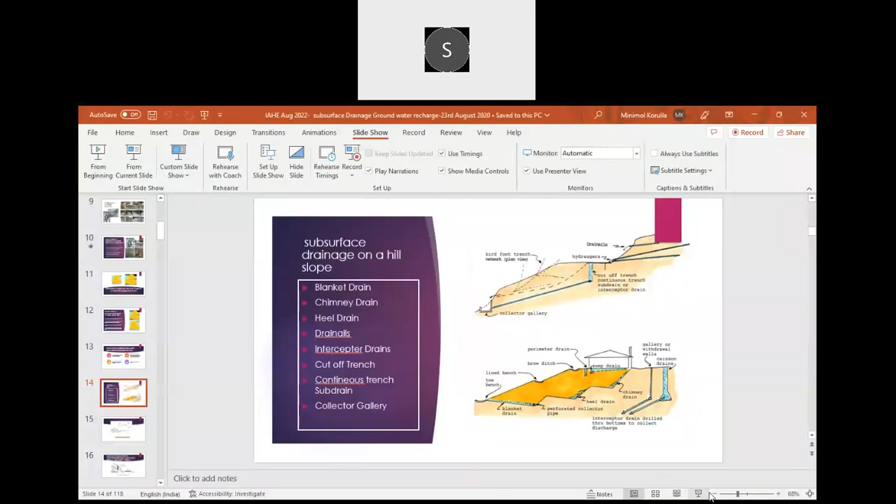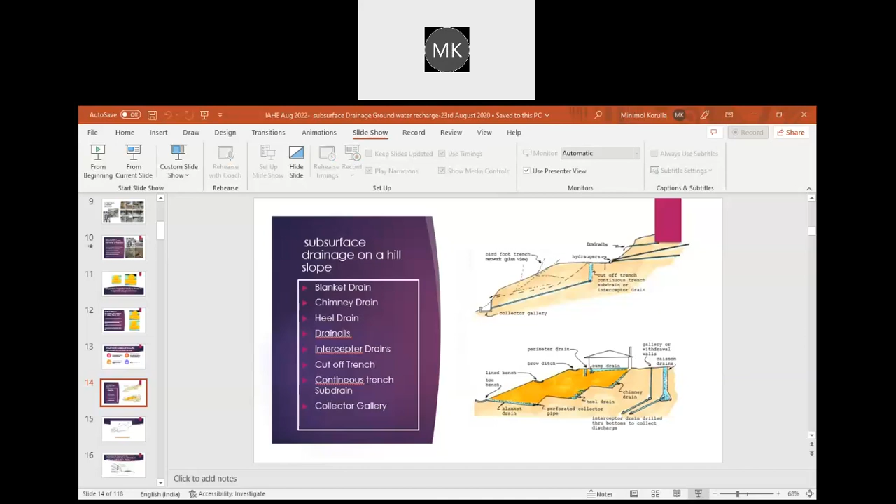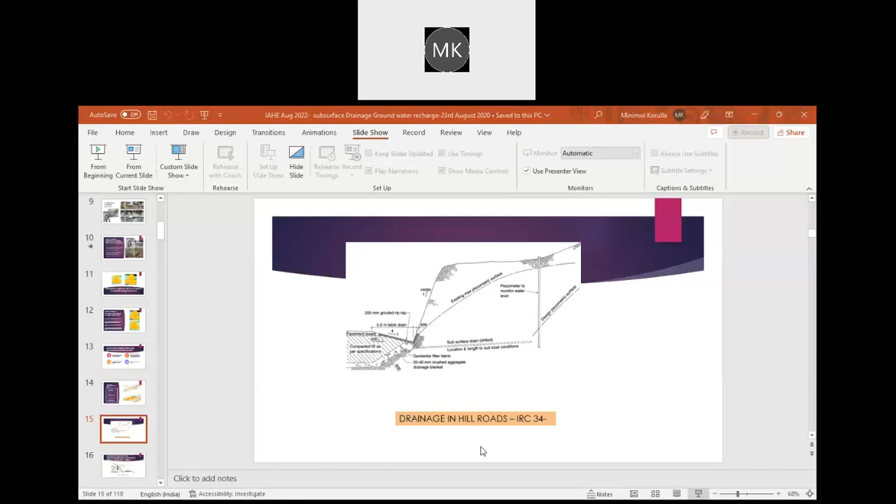Ma'am, the slides are not moving. Which slide are you seeing? It's stuck on slide number 2. Please reshare it. Now it's stuck on slide number 14 this time. Please put it on full screen. Can you see the full screen? No, madam, it's stuck. When you come to the bottom right corner, click there. Can you see the full screen now? Please make one or two clicks, then it will work. Madam, can you reshare your presentation? I think there is something stuck, I will stop sharing and reshare again. We'll find the solution.

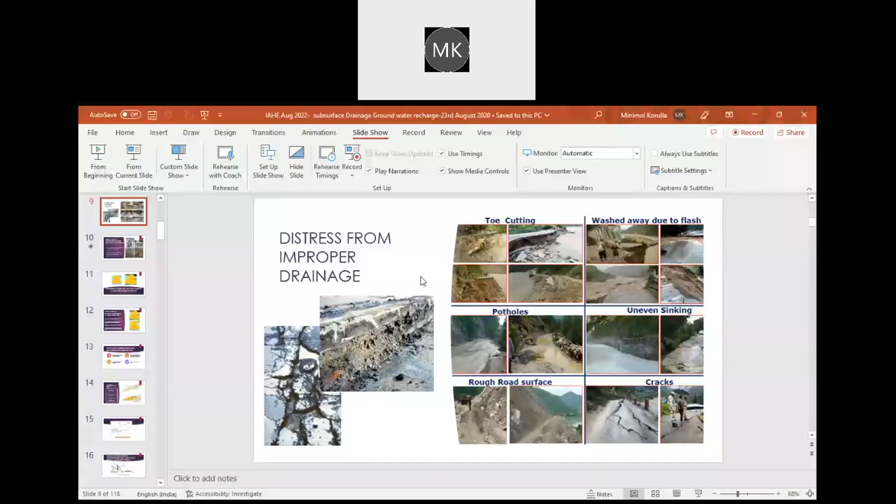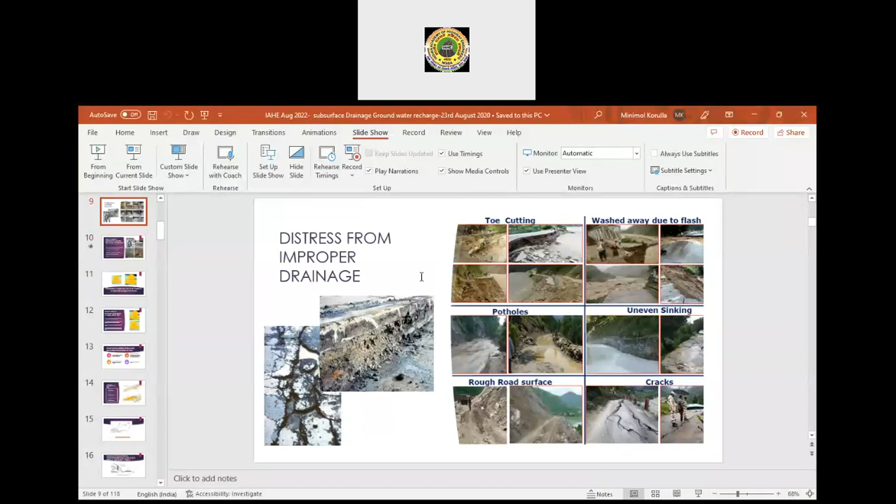Can you see it now? Is it moving? Yes, ma'am. Please put it in full screen mode. At least until you see it. I think that going full screen is creating the issue. Okay, no problem, please continue.

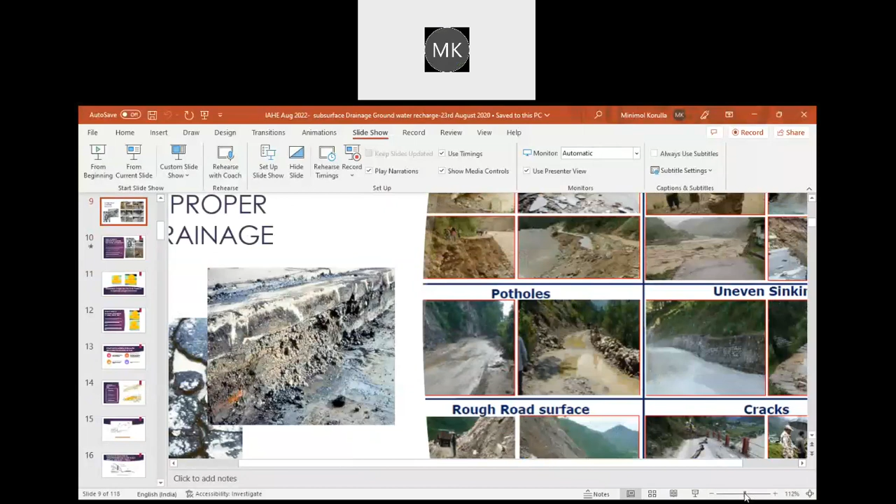I will go through the slides at least once, for whatever you have not seen. So you were seeing only up to the second slide, right?

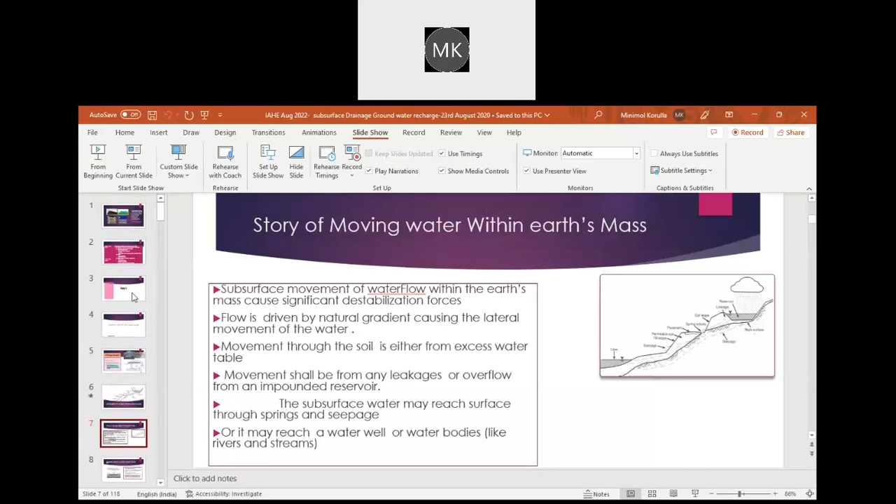Yes. Hello participants, all right.

So I talked about the different types of moisture sources from IRC SP 48. Can you see the slide?

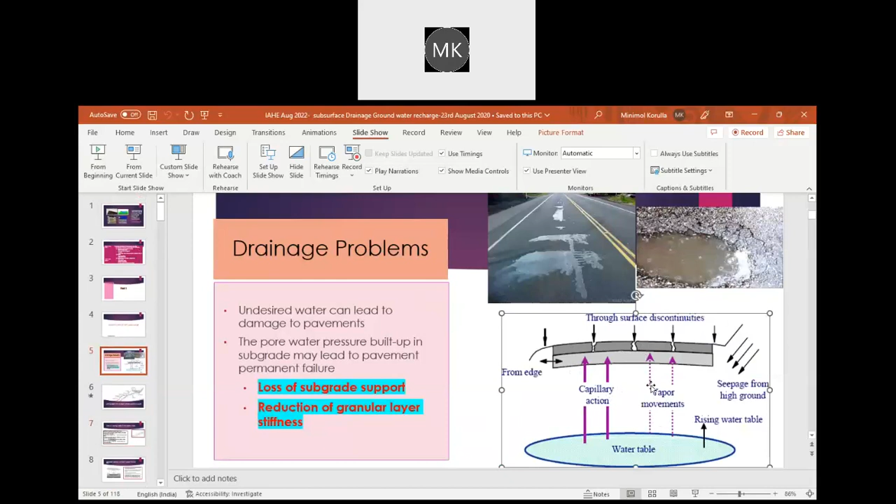Yes, ma'am. This is the movement of water within the Earth's mass. Okay, how it is going. Okay, we have seen.

Were you able to see? I know you are not able to see the complete screen, but at least are you seeing something? Yes or no? Yes, ma'am. Okay.

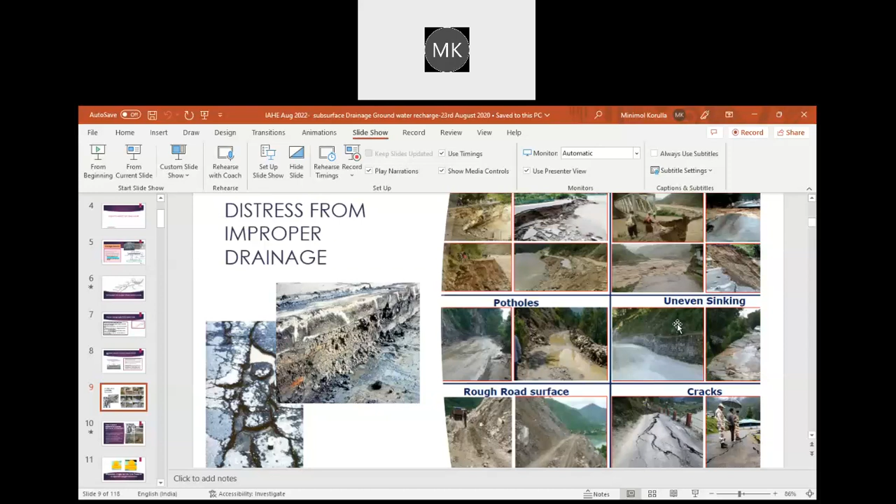Now, when it comes to the cracks, the different types of water movement can cause different types of cracks. So from observing the cracks, we determine whether subsurface water is creating the problem, and how we have to rectify it.

There are different ways of taking out the water, but it requires careful mapping when somewhere a deterioration has already begun.

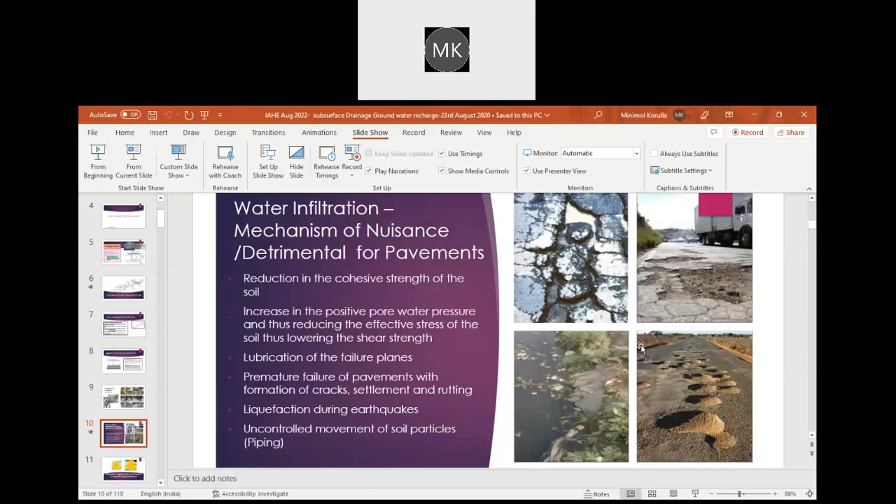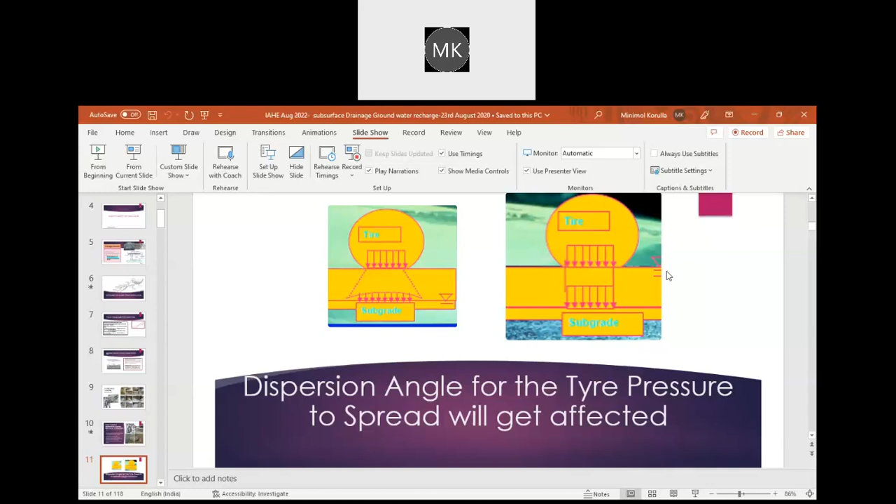Yes, okay madam. Then we talked about piping. Piping is another serious issue. When subsurface water flow is there, there can be piping, and this can cause pavement deterioration, and even the entire road can get damaged because of the piping problem. Not only roads, but piping can cause railways to fail, airports to fail.

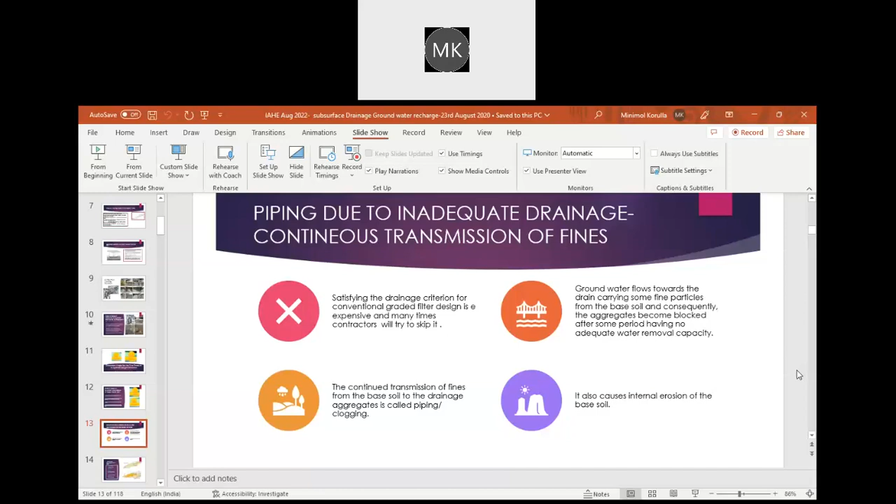The reason is the geological behavior in hill slopes, which will be having different types of aquifers, different types of seepage paths, and different types of infiltration properties for the strata. So accordingly, one has to decide how the drainage needs to be provided.

For this, we will not be able to just see the photographs sitting in an office room and decide how we have to give the drainage in a hill road. Definitely one has to visit the site. Apart from that, a lot of data collection has to be there.

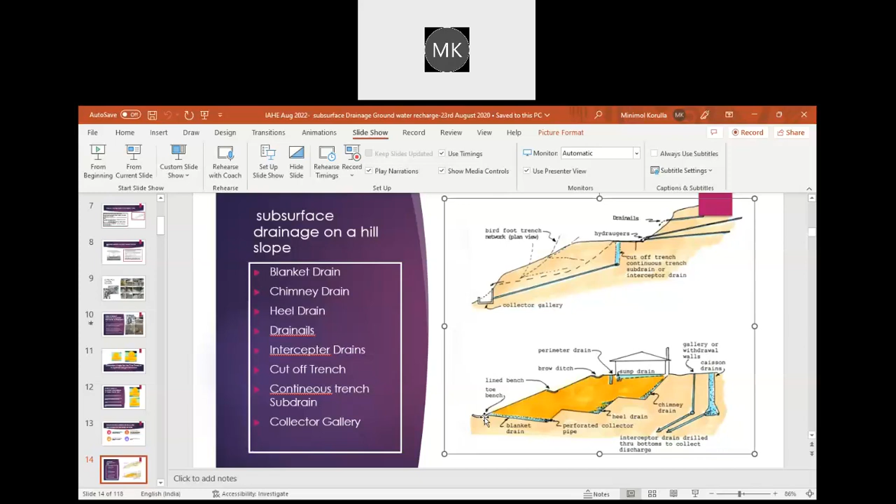Now, the sketch shown was from IRC SP 48, which is exclusively written for hill roads. Now I am coming to IRC 34, which deals more with situations where roads are in flooded or waterlogged conditions. IRC 34 also gives a sketch for hill roads.

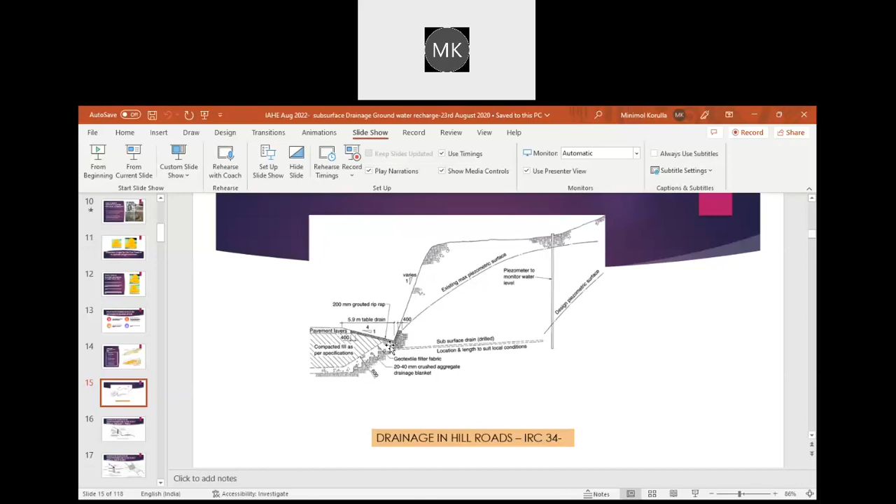In places where we won't get enough space for surface and subsurface drains, alternate materials like drainage geocomposites become relevant. If we incorporate geocomposites where space is difficult to get, we can solve this problem. With aggregate drains, we already know the demerits 100%, since we've been familiar with such materials for years. But with new technology materials like geocomposite drains, which are polymeric products, many merits and demerits are still not clear to road engineers. We'll come to that.

So in those types of cases, we may have to create drainage galleries, which we have seen in the IRC SP 48 illustration. IRC 34 is also repeating that we may have to provide, in hill roads, for hillside slopes as well as valley side slopes, apart from horizontal or inclined pipes and roadside longitudinal drains, this type of intercepting drain like drainage galleries.

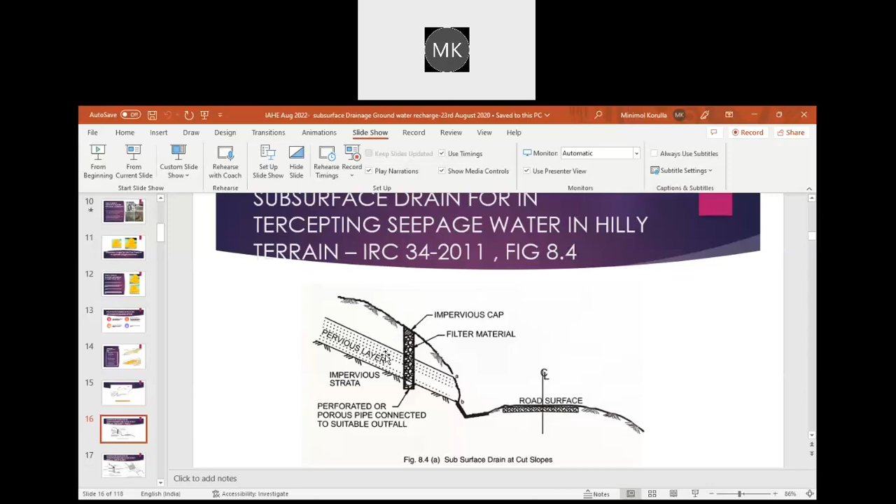So to optimize, we can separate the surface water drains and subsurface water drains. Surface water drains can go with a simple tube system, open drains, which will collect the surface water. For subsurface water, as we are plugging it at the top, the drain will be purely for subsurface purpose, and then we can optimize the size of the subsurface drain.

So there are some more figures talking about the concept in a hill road, again from IRC 34. The left side sketch shows that instead of one single pervious layer, we can go for two pervious layers. And on the front face, if we are providing a retaining wall, the retaining wall preferably should be a self-draining retaining wall. If the height is not much, only 1 or 2 meters, we can go for dry rubble packing.

The masons should pack it properly, dry rubble packing without any mortar or cement, given as the retaining wall. It can go up to 2 meters or 2.5 meters. Then with some pervious layers acting as horizontal drainage, and with this type of pervious retaining fascia, the water will come out.

If the height is more, say more than 2 meters, then we can go for a gabion fascia. Gabions are rectangular cages which can be filled with stones, and each gabion box can be connected to the adjacent gabion box through lacing. Once connected, it acts as a monolithic structure, which is again a free-draining structure. So with gabions instead of a dry rubble wall, we can go to higher heights of retaining wall construction. The gabion, while acting as a toe retaining wall, can also act as free-draining support.

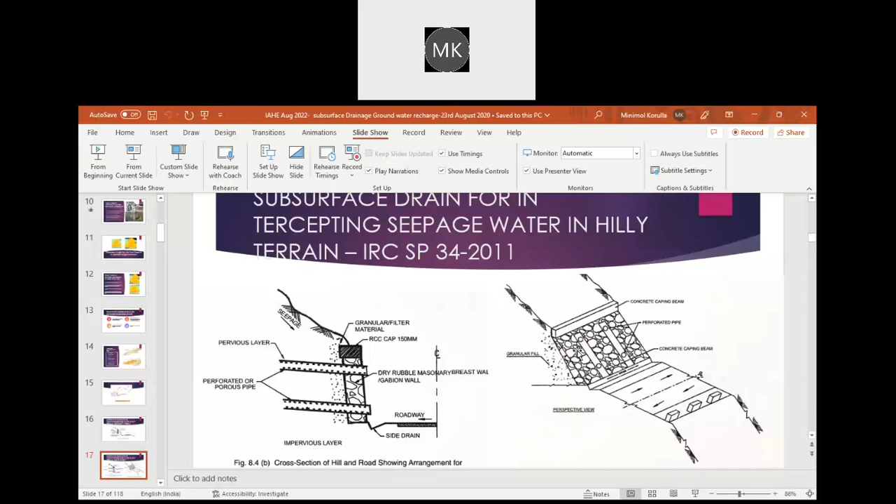Now, simple aggregate drains. Suppose a highway is going parallel to a complete agricultural land or a recreation area where lawn or vegetation is there. In those areas also, the surface water as well as subsurface water, if not regulated properly, can create problems for the nearby road.

So surface water drains can be created in those cases by simply making horizontal as well as vertical drains filled with aggregate—that creates a good drainage system, and that was the original practice. But nowadays aggregate is becoming such a costly material, so definitely for surface and subsurface drainage we have to find out other options.

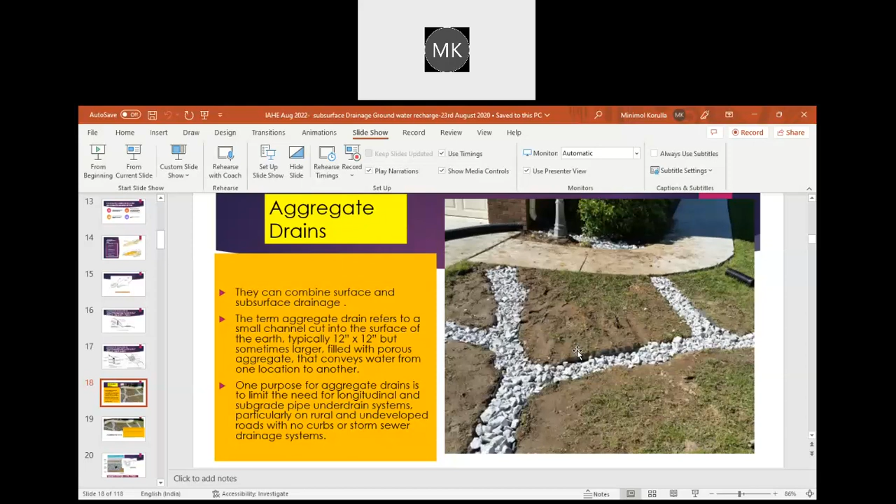Okay, well, yeah. So now it is 11:05. Your break is at 11:15, right? Okay madam, right, okay.

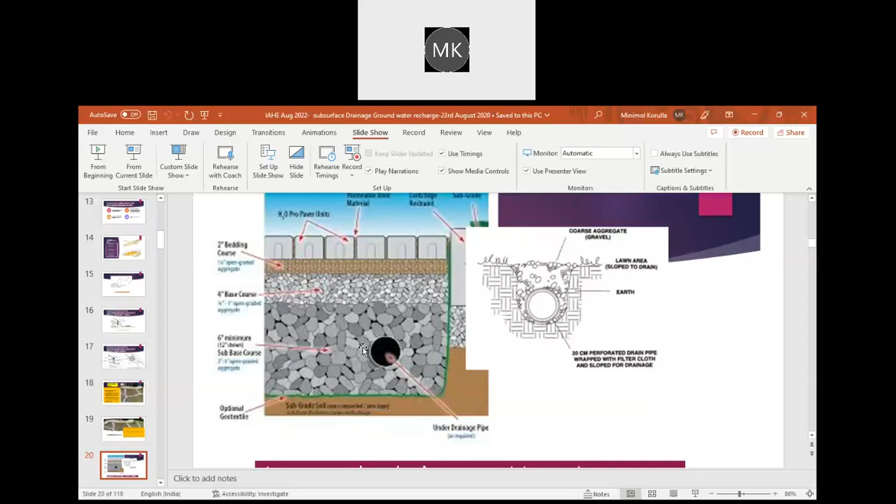So what is the indication here? We are showing the different aggregate sizes when going for base course as well as sub base course. So how these aggregate sizes will be influencing the drainage efficiency—where can we get guidance on that? I have gone to the next slide.

So why am I telling this? See, there are other types of drainage measures, like by means of pressure—vacuum consolidation. So suddenly we can reduce the water level in a flooded area. But the issue will be when we are going for vacuum consolidation or vacuum drainage, maybe a sudden movement can happen.

Suppose a highway is going and we are using vacuum methods where we are suddenly drying the water level by applying pressure—then the relative subsidence which can happen can cause cracks in the pavement surface and cracks in adjacent buildings. So simple aggregate drains or simple subsurface trenches are still the popular method, as they work gradually, but may not cause sudden surprises.

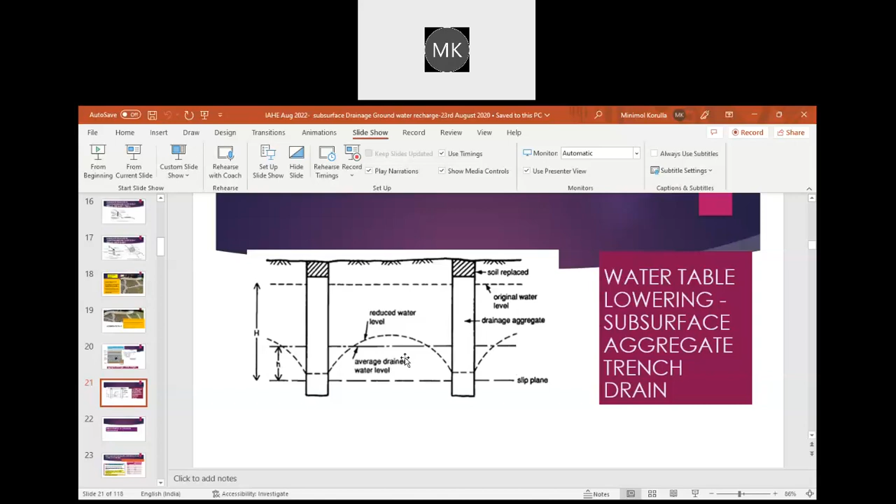Now, we basically want to talk about this after the break, but before the break we have 5 minutes. So I will give you an introduction to geosynthetics in drainage application, as that is also part of today's syllabus. Before talking about this particular slide, I am moving ahead a little.

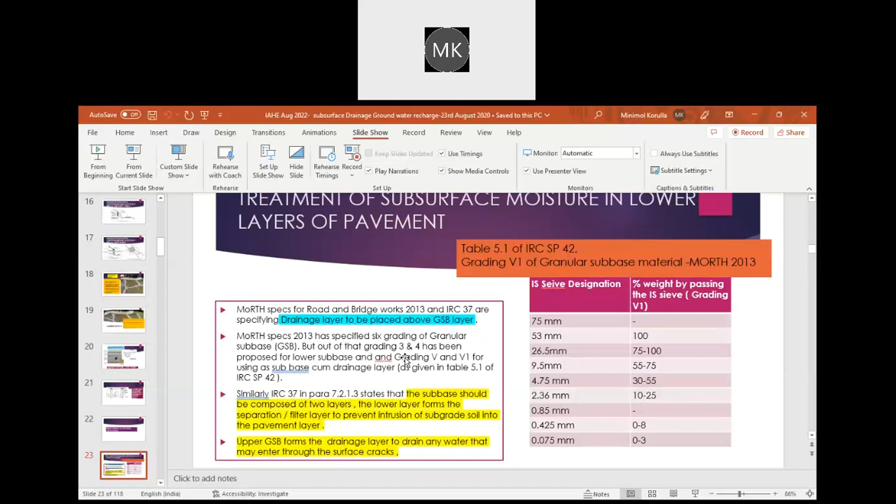Geotextile, I think all of you know about. When we are using a polymeric fabric in presence of soil, that is called a geotextile. Geotextile can act as a good separator as well as a filter, definitely if we are properly selecting it. So if we are sandwiching a geonet in between two geotextiles, it will become a geocomposite, which can be used for drainage purpose.

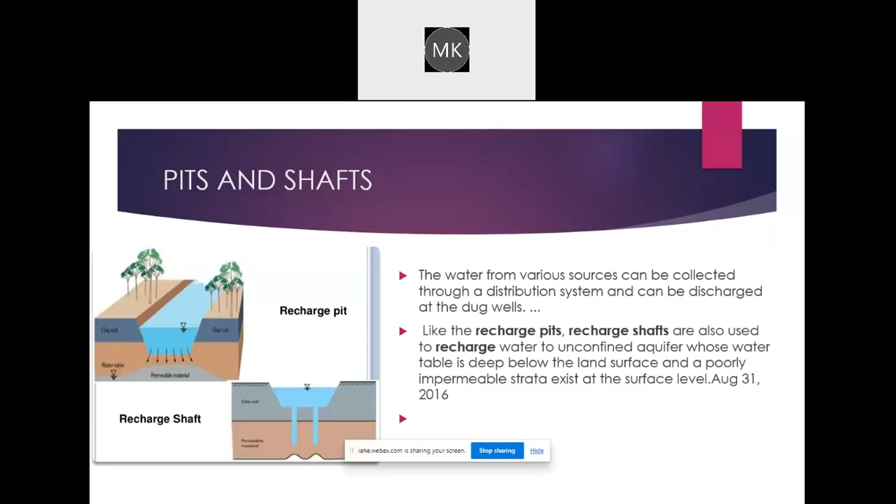Before going to groundwater recharge, any questions about the subsurface drainage or drainage geocomposite? Or shall we continue? Ma'am, please continue. Okay.

Okay, so groundwater recharge. Why does groundwater recharge need to be studied by highway engineers? My answer is: when we talk about drainage water, the water drainage may bring a lot of water, and instead of wasting it as a resource, it can be used for groundwater recharge if channelized properly. As a holistic designer, planner, or constructor, one needs to think about sustainability not only for the highway but also for the adjacent neighborhood where this resource can be used.

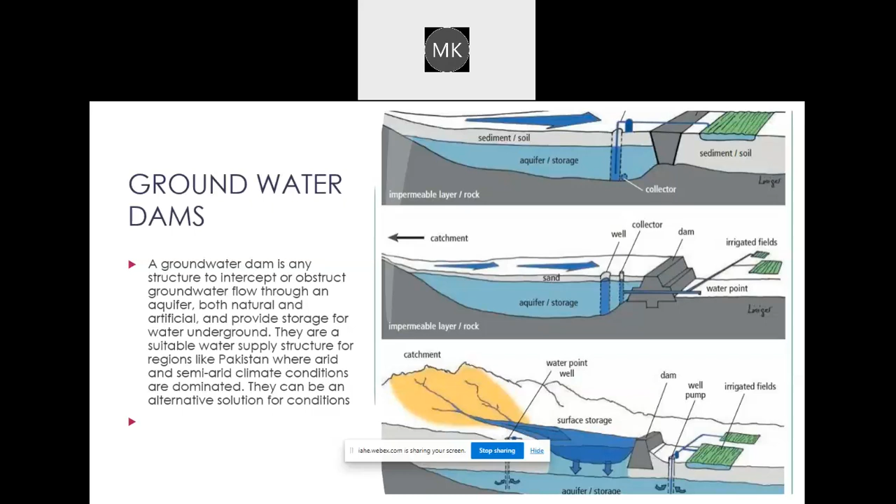Especially in industrial areas, when constructing a road and industrial waste itself is being used as embankment fill or other infrastructure building material, the water leached out from that - whether it has any properties detrimental to human life, animal life, or plant life - that needs to be known.

And artificial recharge, done in an engineered way, can give numerous advantages if we know the right way of artificial recharging.

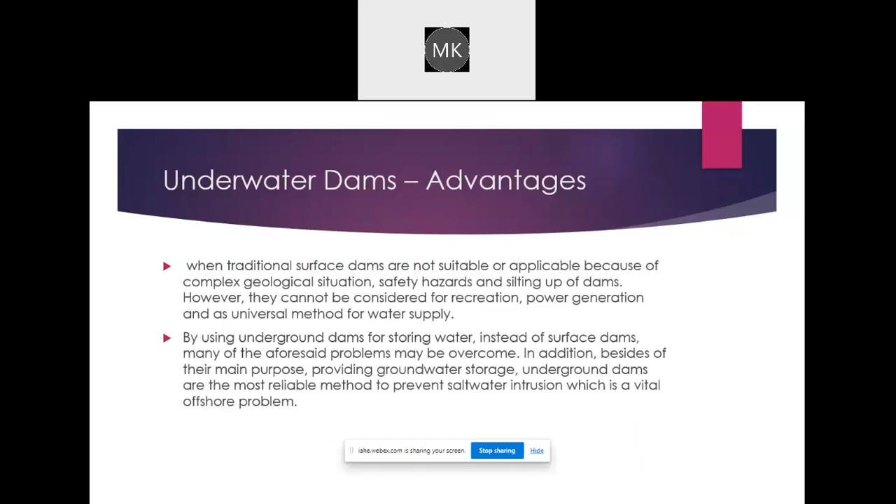So one way is check dams. The check dams are something the water resources department normally uses for collecting water in a stream or river, where they want to store water, divert the water, or dissipate energy - they used to use weirs or check dams.

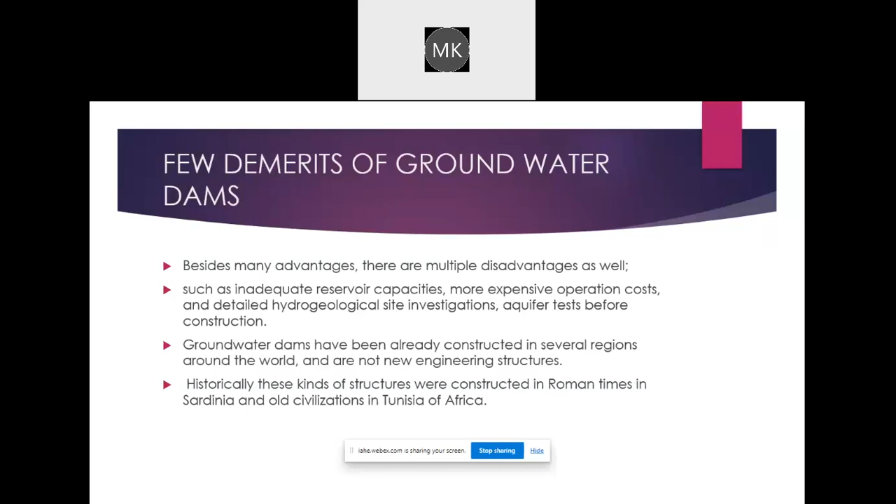But in our case, suppose a hill road is going between a hill slope and a valley slope, and on the hillside a lot of debris flows are happening - a lot of debris flows are happening, and these debris flows are not visible to the road user.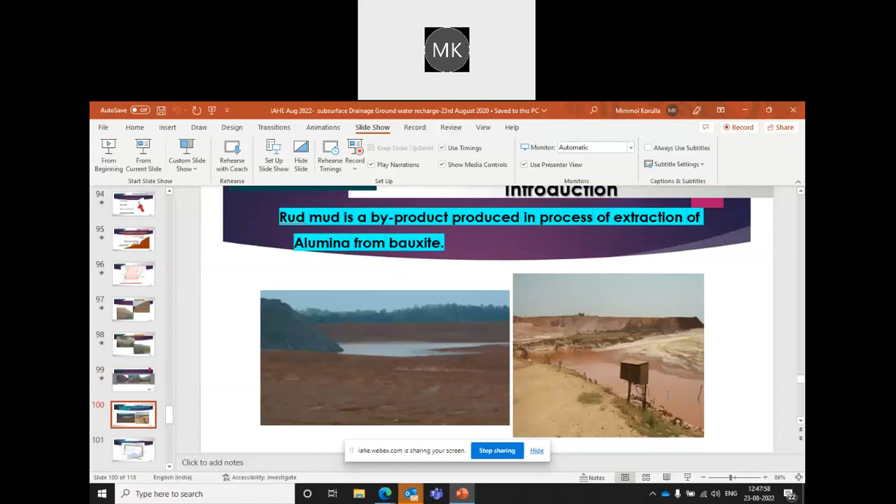So instead of waiting for extra funds to do everything perfectly, whatever we have, since you represent the client organization, you can decide that at least this much will be kept for drainage and erosion control, because these will make a sustainable earth for our future generation. If we don't take care, nobody will.

I will be happy if it can go up to 7 to 10%, but at least 2 to 3% minimum, especially on a hill slope, for simple drainage and erosion control, can avoid a lot of future problems. In many places we cut slopes vertically without drainage, so the slope itself becomes unstable because we are cutting vertically or too steeply. It can stand only if we give very good drainage and erosion control.

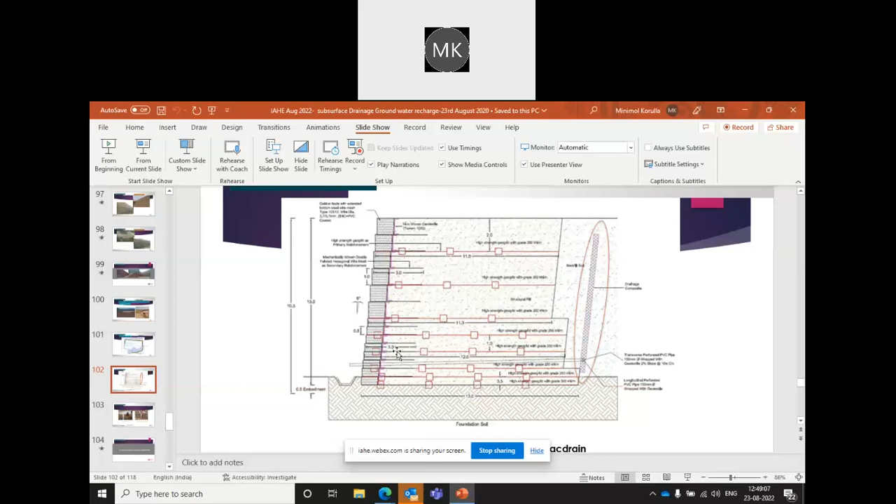Make drainage a practice, even without going for elaborate methods like drainage galleries or check dams. At least we can give some benches, some vegetation, and simple trenches or simple pipes.

Now let me talk about the cost factor. Nowadays aggregate is becoming very costly. Earlier, 20 years before, when I talked about drainage geocomposite at CRRI or the ministry, everyone would listen, but at the end they'd say these are good for research purpose because they are very costly, coming from abroad with 40% import duty. The cost of a drainage geocomposite was around 600 to 700 rupees per square meter, whereas an aggregate drain of the same length would cost only 350 to 400. So geocomposite was double, and they didn't want this type of fancy material.

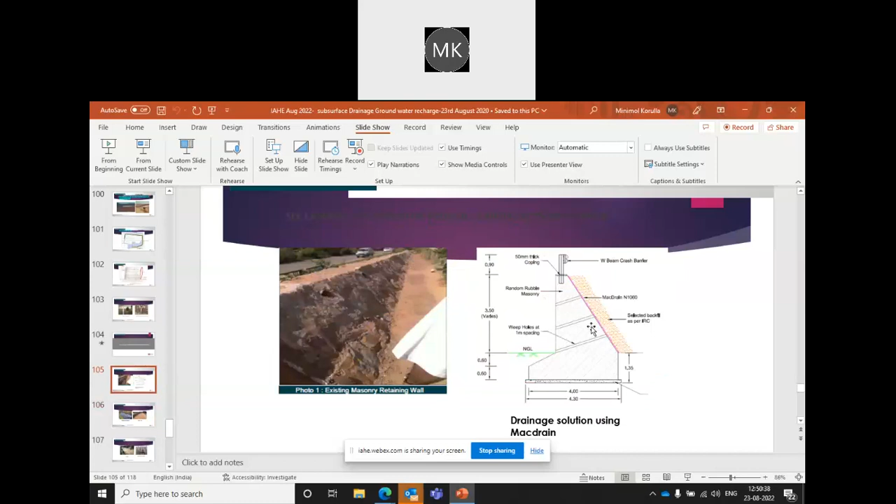And it was right also, at that time. Even though the geocomposite had good quality control from the factory and was very easy and fast to install, it was a fact that the aggregate material was available cheaper in our country.

Now the situation has reversed. The aggregate cost in many parts of the country has shot up, ranging from 800 rupees per cubic meter to 3000 per cubic meter, and in some places much more. Whereas the drainage geocomposite cost has reduced, now available at 150 to 250 rupees per square meter. So compared to an aggregate drain, at one-third of the cost, someone can go for drainage geocomposite, and it became a very hot material.

And nowadays Indian manufacturers are producing it, so there is healthy competition. It is not brought from any other country, so there's no import duty, of course taxes and other applicable charges are there. So the alternative technologies available at present need to be used.

That is again my recommendation, but we will not be having a perfect situation where we have plenty of money to implement the subsurface drainage or overall drainage. Also, some money has to be kept for funding the studies. I was mentioning that hydrological, geophysical, geotechnical, and geological studies are important. I understand when you hear this you will get angry again, thinking so many studies, where is the fund?

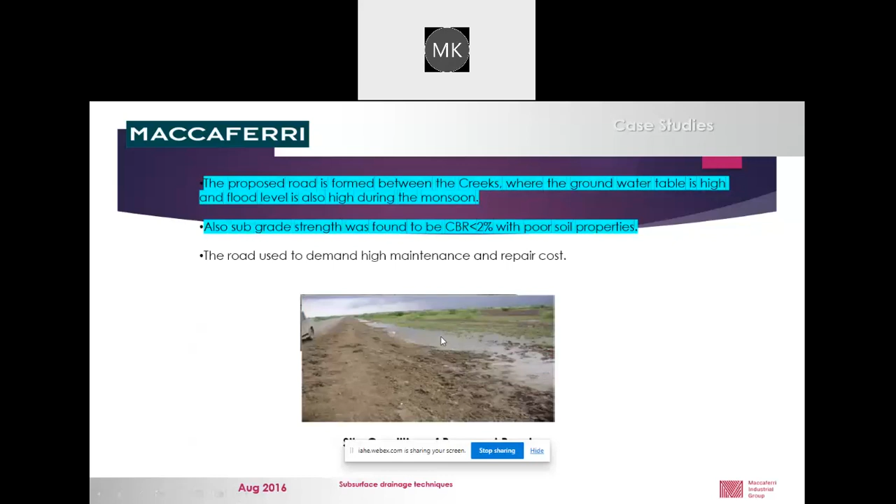My answer is that if at least you can consult an expert at the DPR stage itself. When we talk about 6 types of studies - geotechnical, geological, geomorphological, hydrological - everything will not become so important for every project.

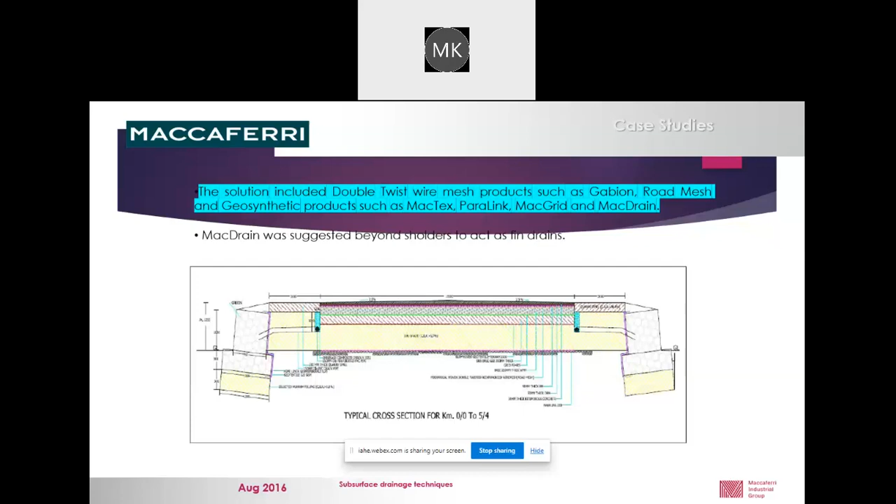Actually, by my own practical experience, I think all of my friends who are from the hilly area will also appreciate that. No doubt it's very costly, but if we see recurring expenditure and unnecessary time consumption, I think this method, whatever the price, is the best method, and we can just save our recurring expenditure.

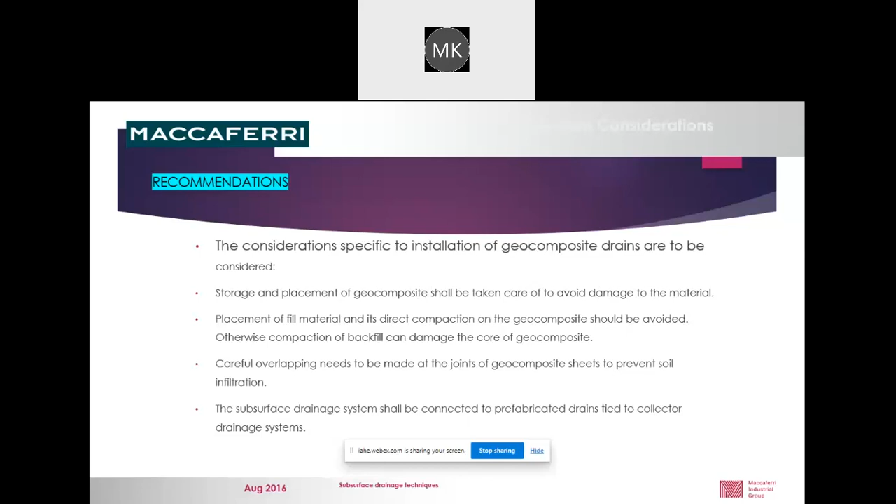But one has to understand that its adaptability to movements and adaptability to water is limited. It is a material quite strong in certain aspects, but it is not a good material where a lot of movements are there, because its adaptability to movement is limited. Otherwise, you need to reinforce it in a very strong way - doubly reinforced, and then maybe steel fibers also mixed. Because the way we construct RCC is we find where the tension will be peaking, and we put steel elements where we think the bending moment will be maximum.

But we are not strengthening the RCC completely in every place to take the deformations. The serviceability, we are not going to that extent for the case of the Himalayas, which is having very high levels of movement that we are not seeing. We only feel the movements when we hear that a big landslide has happened, or a seismic event has happened, and the entire thing is washed away. Then only we feel that the Himalayas is moving.